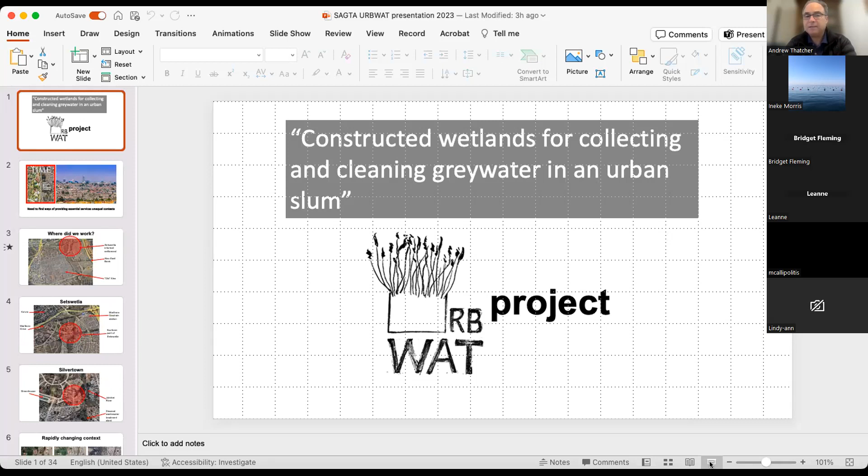Just to answer Bridget's question from earlier, that Vice Chancellor's Teaching Award was for innovation and social impact, which I'm most proud about is that social impact side of things, and it was exactly for this particular project.

I've actually given the very early part of this presentation before. Those who joined a little bit earlier would have heard me talk about the first time I gave this presentation to a SAGTA conference in Pretoria at St. Mary's DSG in 2019, in the land before COVID, when we were just starting the project. So for those who were there, this will be an update showing what actually ended up happening through the project, which also took place over COVID, which added a few complications.

Very quickly, the URBWAT project - it says constructed wetlands, but the actual project basis was to install a nature-based solution for the problem of grey water disposal, collection, and treatment so that it would have a lower impact on the environment.

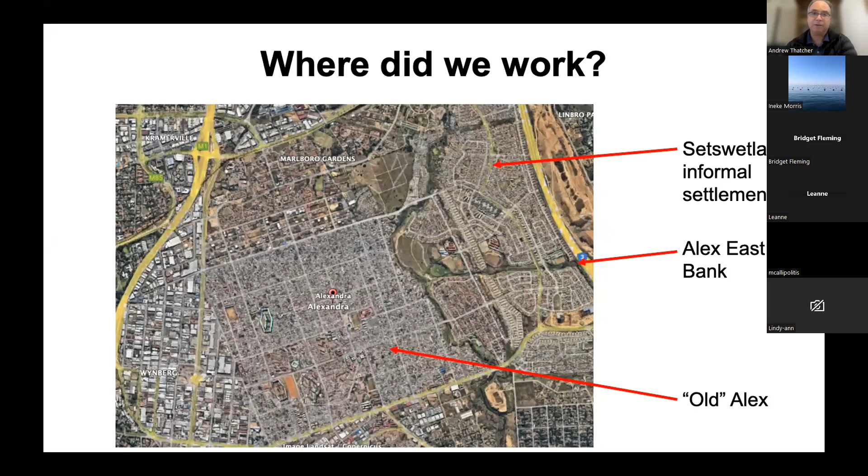We were looking at a small area inside Setswetla. This was a picture taken in 2019 when the project was first starting, stuck right on the banks of the Jukskei River, a little place called Silvertown, between what was called the greenhouse, set up by Gift of the Givers, and on the other side of the river, an old abandoned wastewater treatment plant, which was rather ironic given what we were trying to do.

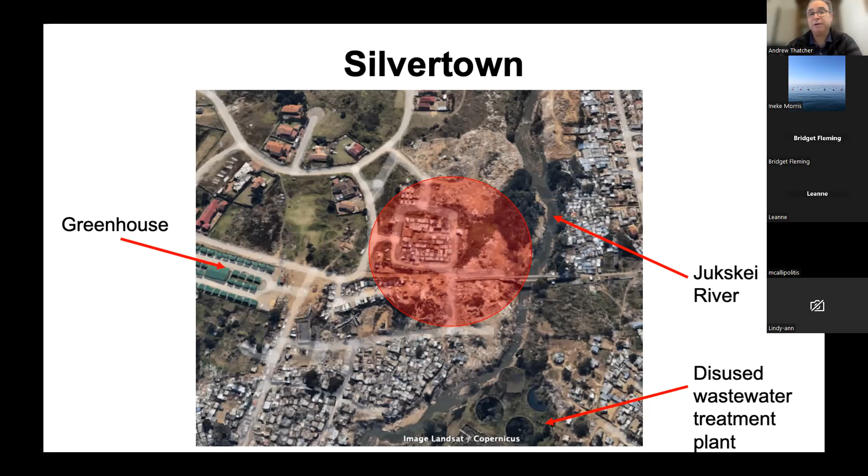This context has changed significantly over the course of the project. You saw a zoomed-in picture from 2019 of that area of Silvertown. Looking at it a year later, it looks almost unrecognizable - Silvertown is hidden among all the rest of these buildings, with a large amount of settlement happening within the space of a year to the north of Silvertown. Then by 2020-2023, a whole lot of other changes happened too - there's now a soccer field put in for recreation purposes, and the area has become even more dense around Silvertown.

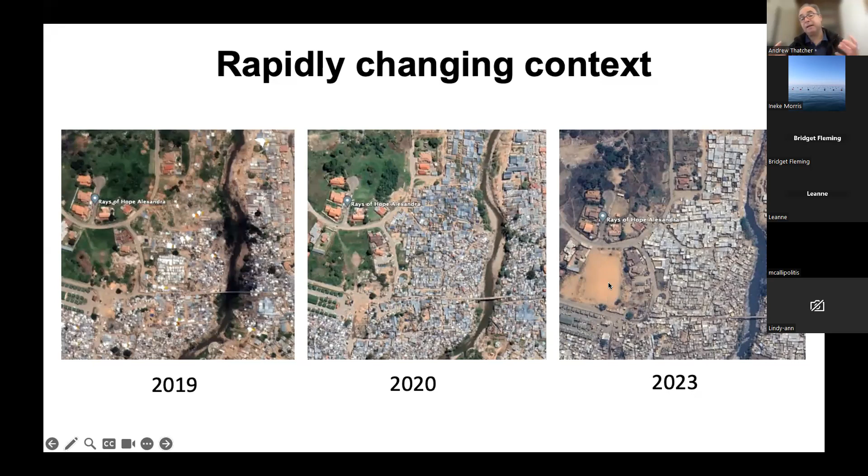What we did when we started this project - I've actually updated the figures from where they were in 2019 when I last gave this presentation. Back then we only went up to 500,000, and we knew that before the water came into the Setswetla area down the Jukskei River, it was very high, and when it came out on the other side, it was even higher, but we couldn't tell you how much higher. This graph is on a log, or exponential, scale, which means that when the water is coming in, the E. coli...

E. coli, measured in coliform units or colony-forming units, sits somewhere between 1 million and 10 million CFUs per 100 milliliters in the water coming into Setswetla. By the time it passes Setswetla, it's sitting somewhere between 1 billion and 10 billion coliform units.

There is so much bacteria in there that you could literally stand a spoon up in the water. It's probably more coliform than it is water itself. That's how much pollution accumulates in the form of fecal coliforms as it moves past this informal settlement, and this Jukskei River eventually ends up in the Hartbeespoort Dam.

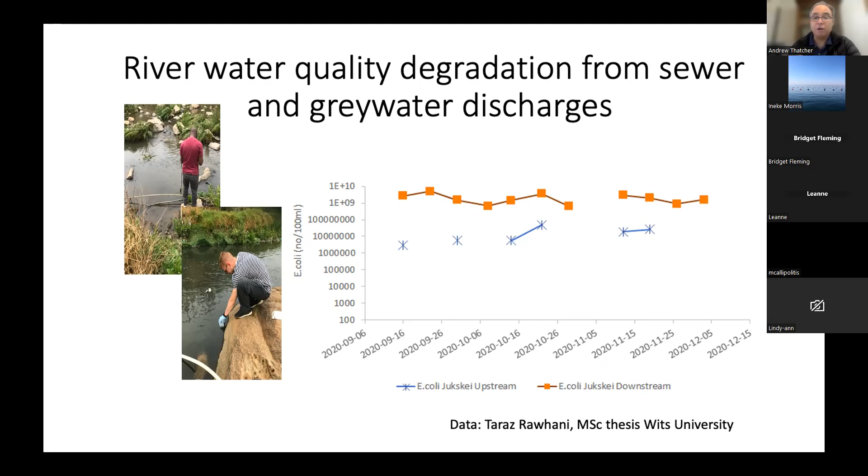So what is the problem here with grey water? The people in this particular settlement have access to piped water, municipally provided through communal standpipes they can collect water from, but there's nowhere for them to throw their wastewater away.

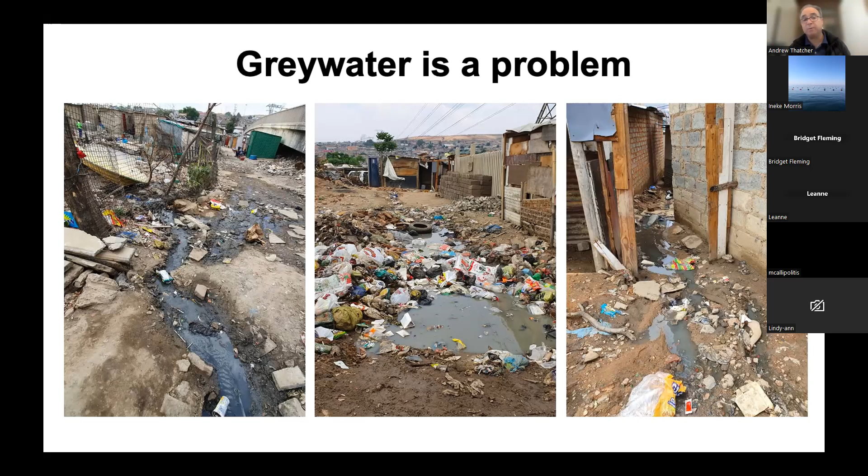Their wastewater, used for cooking, for cleaning themselves, or for cleaning their homes, ends up in the environment, either running through it, as some of these pictures show, or accumulating into pools together with other refuse. It's a particular problem because it ends up in the rivers.

That picture on the right-hand side, the dark color flowing through the rubbish, is actually what we call grey water, and you can see that it's a very, very dark grey.

I read a paper earlier this week showing that when the first rains start coming, around this time of year, we see a huge spike in hospitalizations of small children from diarrheal diseases. Unfortunately, roughly 15 children per month die in South Africa from diarrheal diseases, and we're not talking about cholera and dysentery, but largely issues coming from fecal E. coli.

We also have a particular problem in that space is limited, and these photographs show the types of spaces available for us to try to put in a solution. So we're really constrained in the types of solutions we might be able to implement.

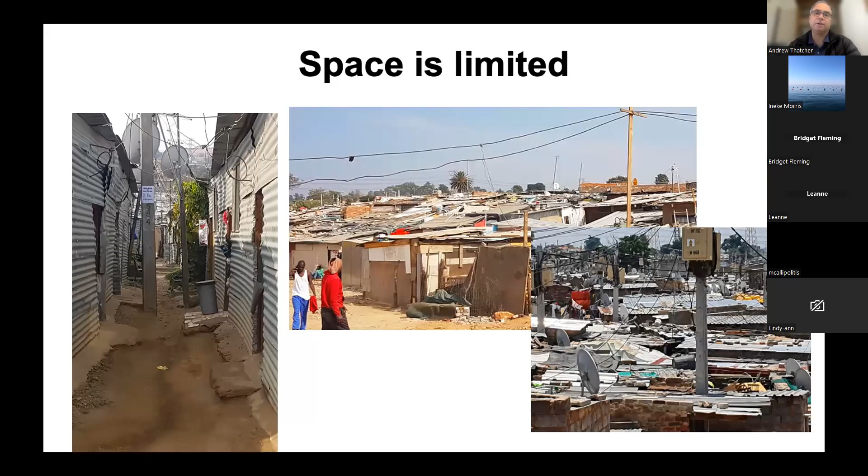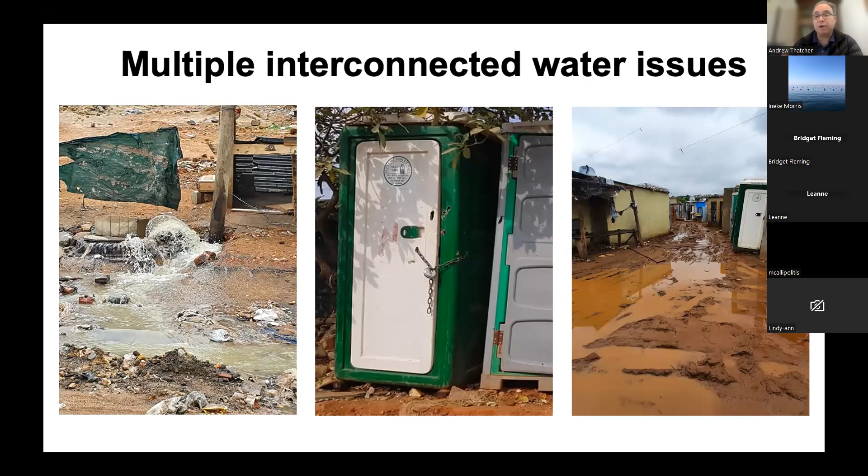We also have problems when the storms come along. Stormwater flows through the environment, picking up whatever rubbish is there and depositing it into people's houses.

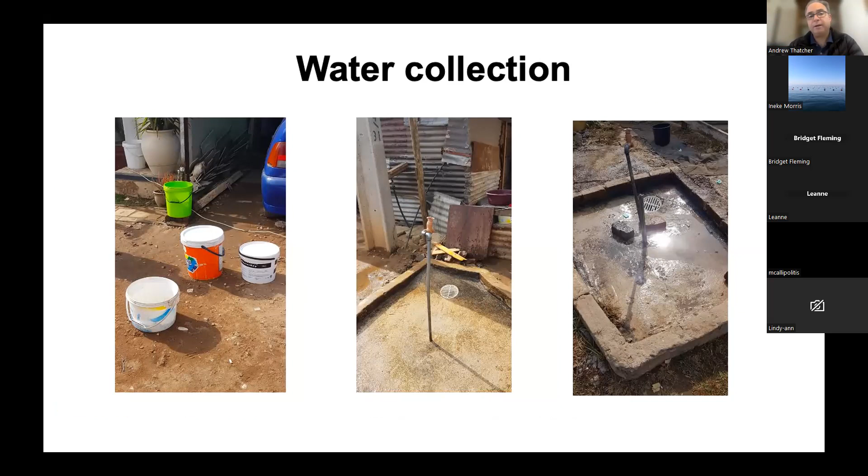Water collection usually happens from these standpipes using buckets, usually 20-litre buckets, converted containers and various other types. Water disposal is usually into the environment, either in dug gullies like the ones shown here, or just directly into the environment, flowing naturally down to the river.

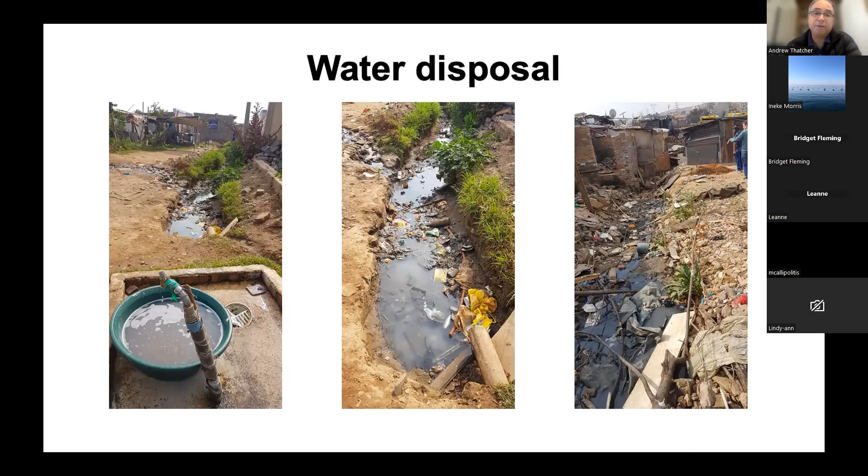So how did we start this project? Shortly after I met with you guys last time, we started our initial design workshops. We wanted to work with people in the community to come up with identified solutions, designed to be nature-based solutions.

We had 6 different workshops with roughly 20 people each time, from the community, where we looked at diagnosing the particular problem and then trying to come up with solutions. The solution we arrived at was an iterative design approach, since it became obvious we couldn't just look at one intervention and see whether that would work.

First of all, people didn't really know what a nature-based solution would look like. And even if they did know what a nature-based solution would look like, there were too many of these different competing demands to know which one would actually work. So what we did is we designed an intervention strategy that would look at build, evaluate, look at how we might change it, build again, build a second time.

What I've shown over here is actually what we ended up doing. We had a strategy in 2019 that essentially what we would do is we would rotate this through 6 months. So every 6 months we would put something in, evaluate it, and then redesign it and move forward. What ended up happening, as you might notice, between 2020 and roughly halfway through 2021 was the little problem of

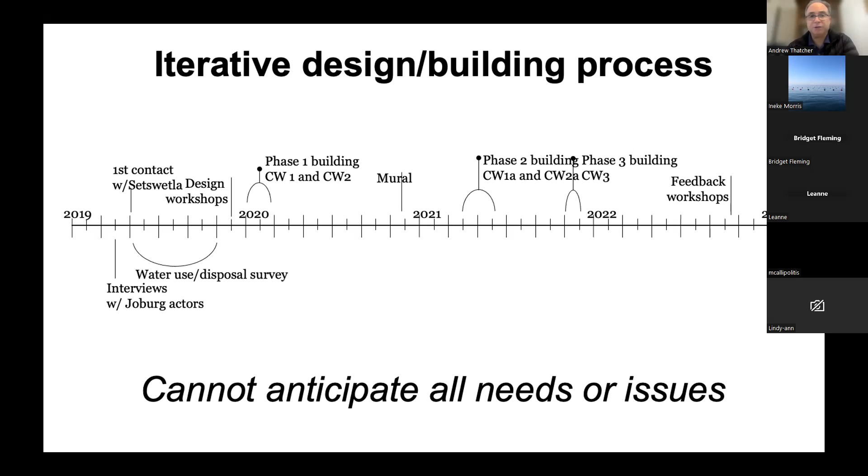So we identified 3 building sites from the people that we went into this area called Silvertown, and the residents of Silvertown helped us identify 3 different sites where we could build. In the first phase, we actually only built something at CW1 and CW2, so constructed wetland 1 and constructed wetland 2. And site 3 we used as a comparison site. So we're saying, well, this is a site where we could have, but what ended up happening in this site that was different from the other 2 sites?

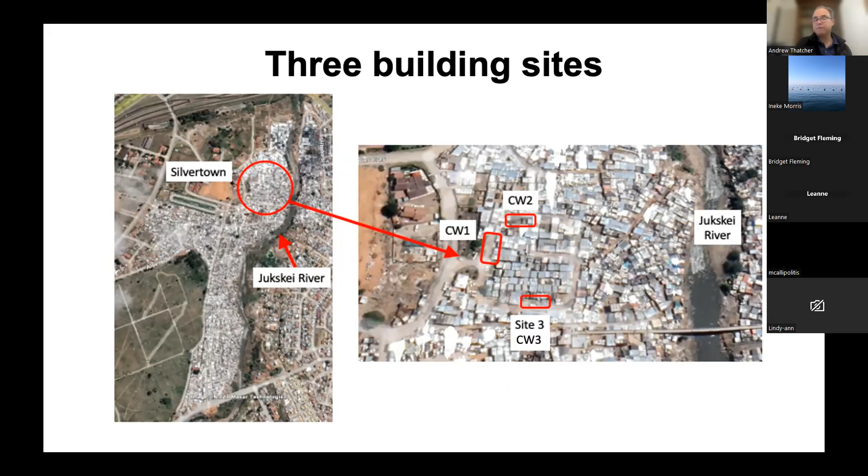On the basis of the drawings which people in that area had worked on with us, and working with people in the area, so these are all people who live in Silvertown, who helped us design and build these particular constructed wetlands, we came up with these 2 different designs. What we have over here is a raised platform for pouring the water in. We have the gravel beds where the grey water would pour through.

And what we did is we planted Juncus effusus. If you know anything about wetland plants, Juncus effusus is an indigenous South African sedge grass, which we'd actually seen growing in the Jukskei River. So we thought that this would be a good opportunity to say, well, if it could survive in that water, perhaps we can plant Juncus in this particular wetland and then see what ends up happening. This is what happened 6 months later.

So just to give you a bit of a timeline over here, we finished those wetlands on the Tuesday in March 2020. And on the Thursday of that same week, we went into a hard lockdown. So we really, for 6 months, gave it a hard test. We didn't do anything. And this is essentially what we were left with when we came there 6 months later, when we were first able to go back in with face masks and all the other types of sanitary and protective equipment that we needed to take with us. This is what we found.

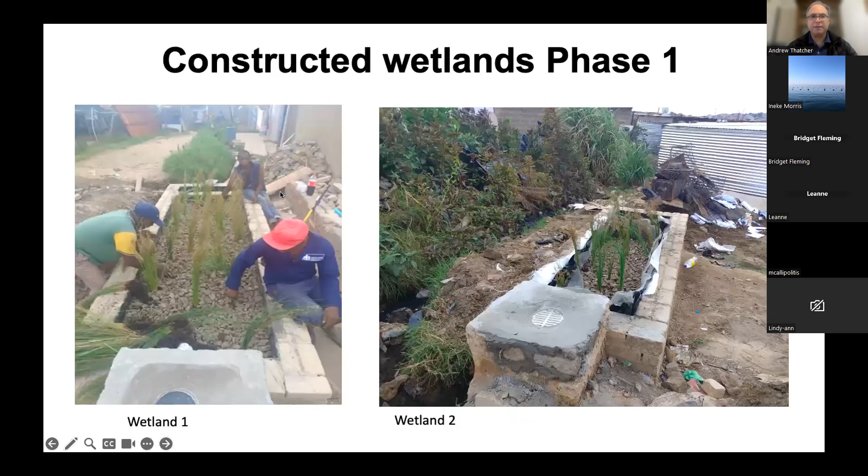There were a couple of Juncus over here that had managed to survive, but pretty much they were all dead. And in fact, if you go back a photograph, you'll notice this particular wetland over here, where this gentleman over here is sitting. And you'll notice that someone had built their home right up against the wetland. So it wasn't just that our wetland had changed, the entire environment around it had also changed. So we looked at what might have ended up happening, and we tried a couple of interventions.

So the first thing we did is, against this particular corrugated iron, we found someone in the community and they painted for us a diagram of what the wetland actually was and showed people how to use it. And then what we also did is we thought, well, maybe these Juncus that we'd got, which were actually bought from a nursery in Melville, where I stay, maybe they weren't the right plants, maybe they weren't habituated. And so we went down to the Jukskei River with a lot of protective equipment and dug out the Juncus on the banks of the Jukskei River, and we replanted the constructed wetlands with that.

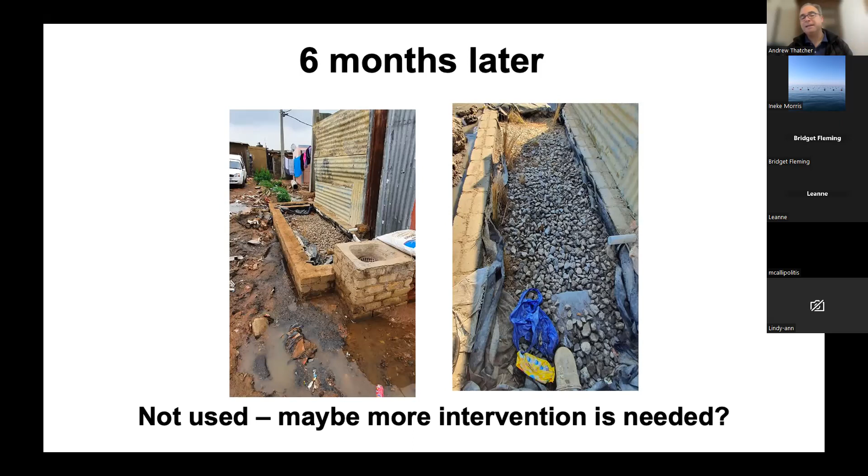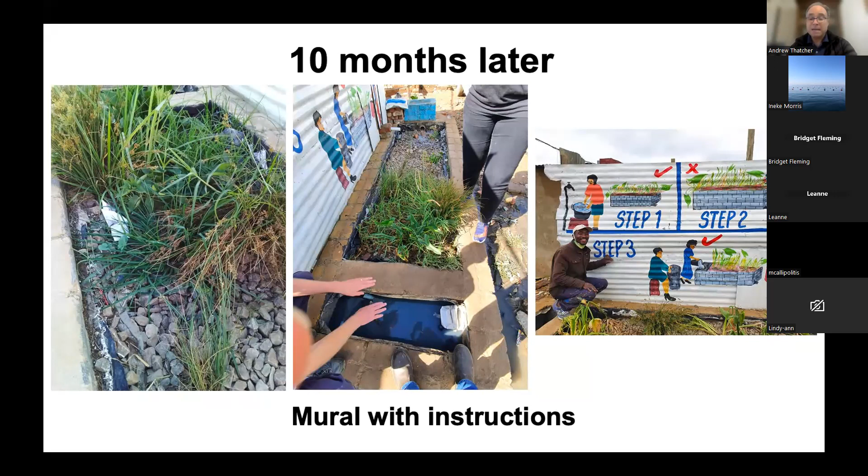And then we also have a picture of Goodwill, who very kindly allowed me to take his picture of the drawings showing people how to use the wetland itself and also what to not use it for. What we did after that is we ran a usability study. We had some of my students come in and they did observations over 3 days, and we looked at how people were actually using these wetlands. And you'll see that two things happened. First of all, we found that there weren't actually a lot of people using these wetlands.

And when they did use the wetlands, you can see in this picture in the middle, they were throwing their water to the side and not actually into the wetland. And the entry point was being used as a table rather than as an entry point for the wetland. There was some water going into the wetland when people had much smaller buckets, but these larger buckets, which are in this particular case used for washing clothes, were not actually being used. And so we went back to the drawing board again, and we went back to the people living in Silvertown, and we looked at what we could be doing to try to get it to work.

What we did notice, though, when we're looking at the hard science type of things, is that the wetlands were working. So when we looked at measuring, and this is the chemists on the project, they were measuring the E. coli as it went in, at the entry points, and E. coli at the exit points. And again, this is on an exponential scale. You'll see that the outs generally are much lower than the ins. So the outlets are much lower, except for one point over here in September 2020. The rest of the times, the E. coli measured as it came out was much lower.

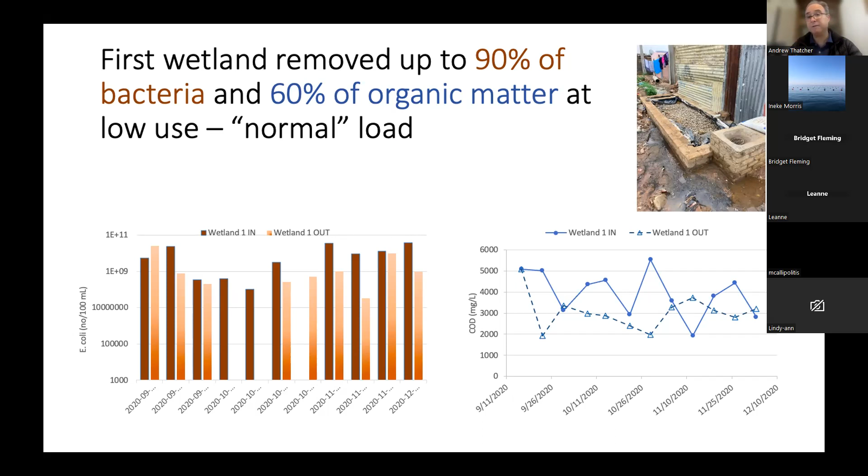In fact, what we found is that it was reducing roughly 90% of the bacteria, and 60% of the organic matter was being removed through the wetlands themselves. And something called COD, which is essentially a measure of the chemical oxygen demand in the water, shows us that a lot of the oxygen was being used up, so there was a high oxygen demand in these particular wetlands, which shows that there was a lot of bacterial and life activity happening in the wetlands themselves.

Here are some of the engineering sketches that we had of now looking at Wetland 3. We designed Wetland 3, sorry, we didn't actually implement Wetland 3 at phase 2. We implemented it at phase 3. But what you'll see is that based on our observations and chatting to the people in the environment, we built a washing area. And this washing area then directly connected onto the old wetland, the wetland from phase 1, and then a much longer section that we had. And we designed this for a number of particular reasons.

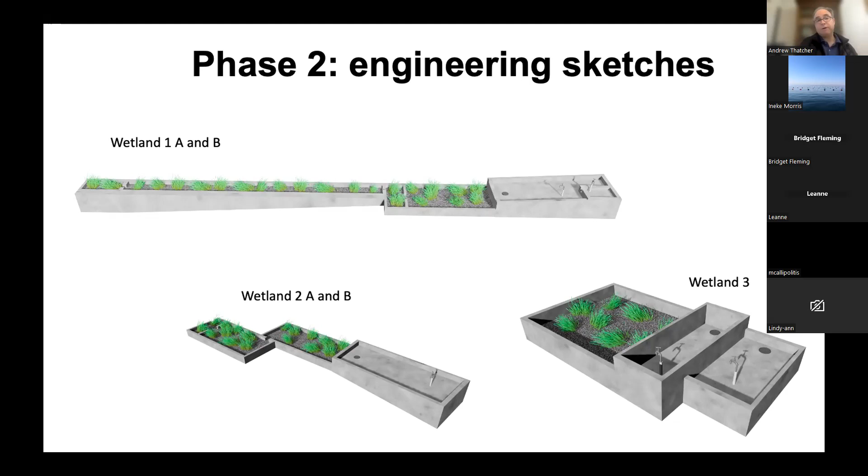First of all, we noticed that people were bending over a lot when they were doing their washing. And we didn't want them to have to lift up a large, heavy bucket. So instead, we created a washing area so they could lift their empty buckets onto there, fill it up with water and do their washing in that area. And then when they'd finished and needed to empty it, all they needed to do was turn over the buckets, and the water would flow down the sloped washing area into that inlet into the wetland, and then flow through the wetlands, and we'd see what ended up happening. So here is the particular design. This is actually what it looks like in real life, the ones on the left and in the middle.

And this is wetland 1. On the left-hand side, you can see the diagram showing it flowing through two different taps, one tap. So for example, if someone was washing, someone else could still come along and collect water for their house, or for drinking or for cooking. And then it would flow into that wetland.

That picture in the middle shows how we elevated the wall, and notice how we made the wall much wider. So as I said, for 3 months, the sewage flowed through this area. And it actually didn't flow into people's houses because we designed this gutter along the side. Ostensibly, we designed it to protect them from stormwater, but it actually also worked to protect the residents from the sewage which spilled in that particular area.

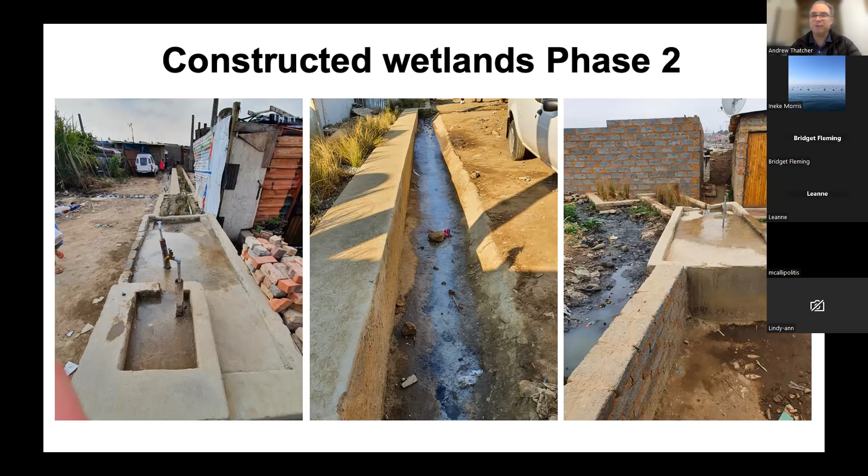And on the right-hand side, you can see that we also had to build walls to keep the water away, and that's wetland 2 on the right-hand side there, a similar type of design, and someone was also building their house almost right onto that wetland. We then allowed this to settle for 6 months again, and then we went in and had a look, and we did another observational study looking at what ended up happening in this environment.

So you can see the ladies on the left-hand side, they were using it exactly as we had intended, and this gentleman on the right-hand side, not quite exactly as we'd intended, because he's actually standing on the side where the grey water flows past. But you can see how it protected the houses from that grey water, preventing it from going into people's houses. And the walls themselves were actually used as meeting points.

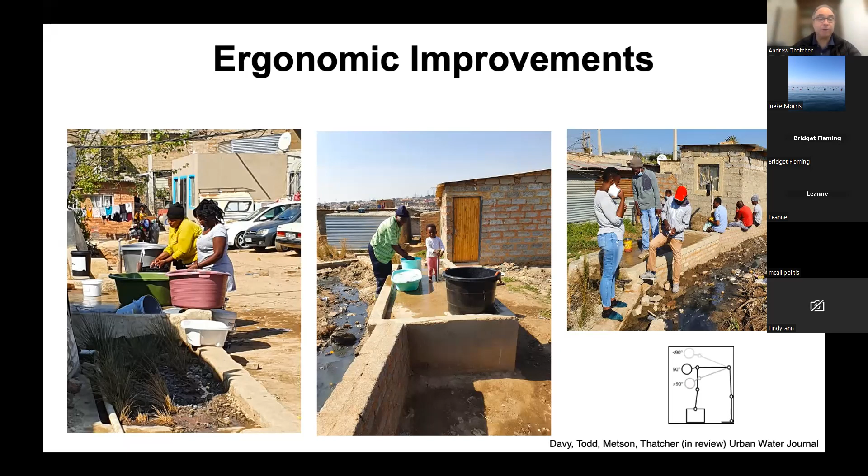In fact, that one on the right-hand side was a very popular meeting point. It was sheltered from the wind, and it was a great place to go and have some casual conversations and maybe smoke a little bit of weed. So essentially what we ended up managing to design was areas which were more multifunctional.

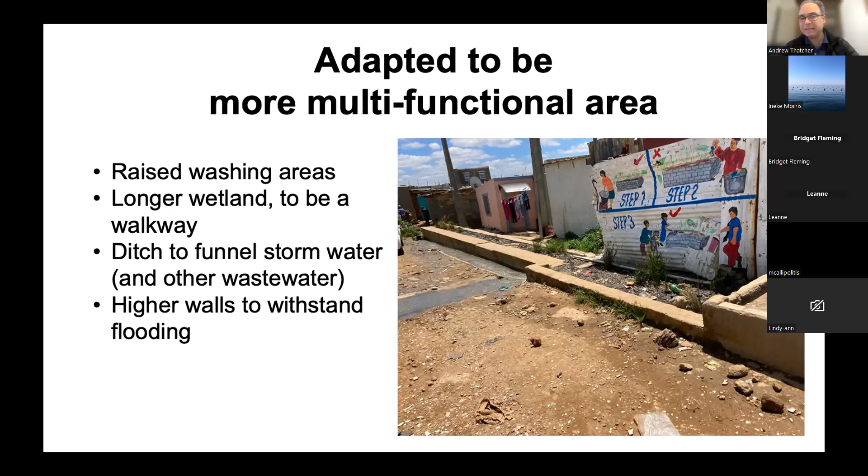In this particular photograph, you can actually see the sewerage flowing. It comes in from the left-hand side of this picture and flows down next to our wetland. So we're keeping it separate from the wetland, but also separate from people's houses. And it also acted as a walkway, so people didn't actually have to walk through that sewage, but could step up onto the constructed wetland itself. The plants have survived relatively well, not fantastically well, but they are surviving.

When we look at taking chemical measurements about what's going on, the first thing we notice is that the water coming in is highly alkaline. The pictures on the left-hand side show us why, as well as the probe that was in there to measure the pH levels. And that's because we have a lot of washing liquids, which tend to be quite alkaline.

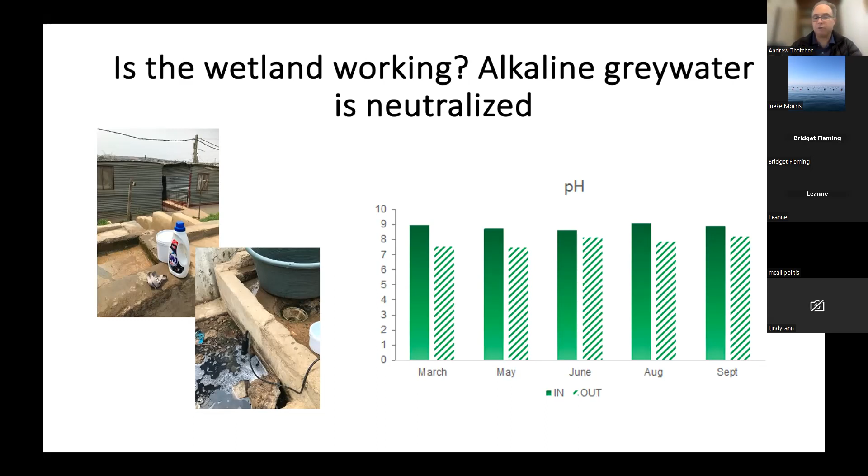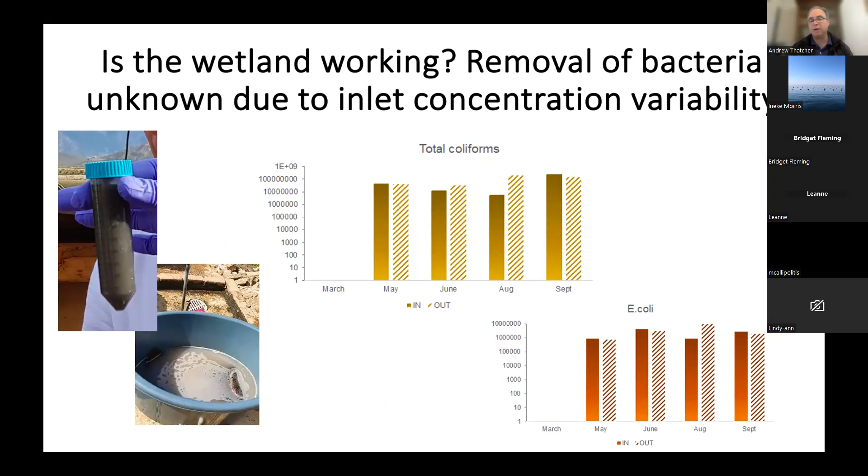So what we find is our wetland is working incredibly hard. There is just too much E. coli going in here. The measurements of E. coli going in here, if we go back over here at the endpoints, are sitting at roughly 10 million E. coli units, between 10 million and 100 million E. coli units going into the wetland.

So there's a lot of E. coli in here, and the wetland itself is working very hard to try to remove the E. coli. There is just too much E. coli in there for it to remove it. And so every now and then when we get these flush effects, for example, when someone pours a bucket of fresh water into there, it flushes through the system, and it actually flushes the E.

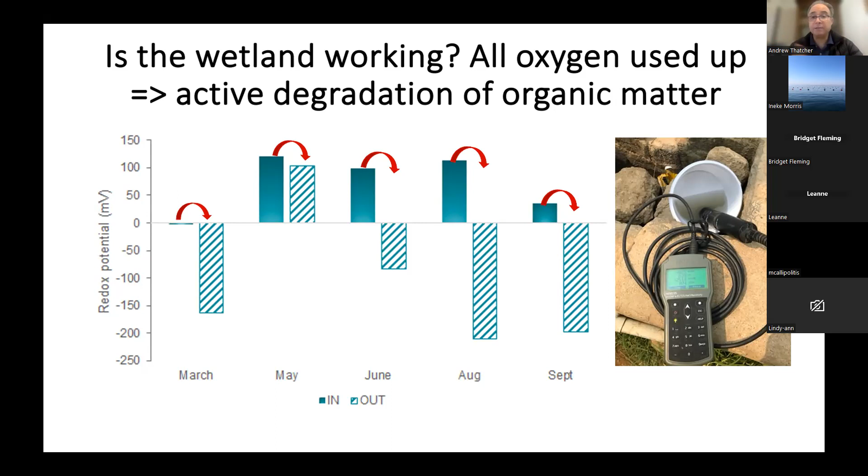coli out rather than having a longer residence time. So what we need in this type of environment is a much longer residence time.

So in summarizing, and I'm getting to the end of my talk now because your two facilitators said that I must try to keep this at roughly half an hour so I can leave some time for questions.

What we managed to do is significantly increase the amount of grey water intake through this redesign process. We also managed to have a number of other types of benefits which weren't the primary purpose of what we were doing, but also are incredibly important for the community. And those include things like having a raised walkway for the community residents, so they didn't actually have to walk in this sewage as you see it passing over here. It also acted as a sewage spillage protection.

We created communal areas where washing activities, particularly if we compare this to the rural environment, we have mostly women who are doing the washing, so creating these communal areas. We've reduced the chances of back injury by raising the platform for the washing so that they don't have this excessive stooping posture. We've heightened awareness around grey water and grey water risks, which means that people living in this environment are more aware of what's going on.

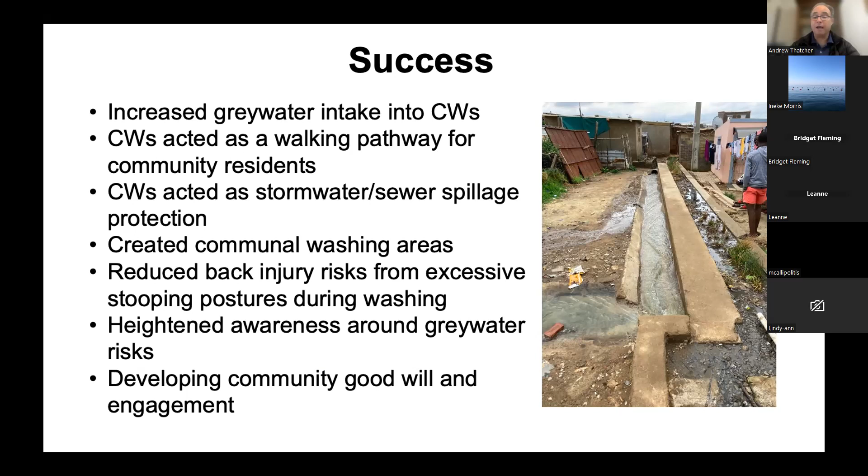And probably equally importantly, we've created a huge amount of goodwill in this area and engagement. We continue to be involved with not just this project, but with a number of other people who've found us out and are also trying to do different projects. There are at least 7 different departments at the university who are now working in this area, and that's part of the goodwill which we've developed going into that project.

But there are things which have been less of a success, and these are also important to notice. The increased grey water disposal into the constructed wetlands has led to reduced residence time and therefore a lower treatment effect. In other words, we're a victim of our own success. By making it more successful, by putting more water into it, we get less of a treatment effect.

We also notice that there's a rapid amount of sludge accumulation in the constructed wetlands. Within 3 or 4 months, they become completely clogged with sludge. We've gone and we've measured the sludge. Most of the sludge actually comes from fabrics. So in other words, from the washing process, that hand washing process rubs off a lot of fabrics into there, and that gets caught up in the gravel, and it starts to block the treatment function. So we need to look at a different way of creating maintenance, or alternatively settling to try to remove the sludge before it enters into the wetland.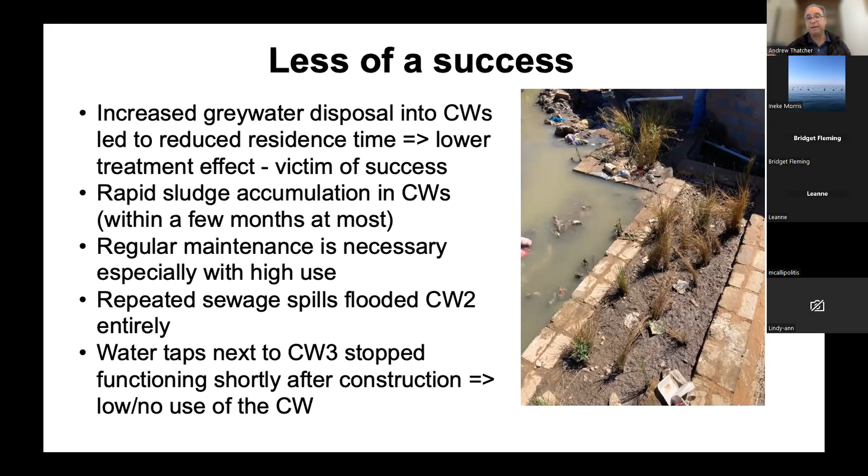I neglected to tell you about constructed wetland 3. We built a large portion of constructed wetland 3. I'll show you a picture of it in a slide or two. But what ended up happening is we built constructed wetland 3, and then the tap stopped working. So it never actually operated as a constructed wetland. And that's just a factor of the environment which we're in. We got fairly lucky with constructed wetland 1 and 2 that the taps still carried on working. But in constructed wetland 3, too many connections were made to that standpipe, and the pressure just dropped off completely. And when we raised the taps, there wasn't enough pressure in there for the taps to work.

At constructed wetland 3, the residents asked us to take out, and in constructed wetland 1, we actually removed all the gravel and cleaned it. I haven't been there in 6 months, although my colleagues have been through there. But we have just got some new funding, partly on the back of winning this award. And so we'll be going back in to see if we can try to solve some of these problems.

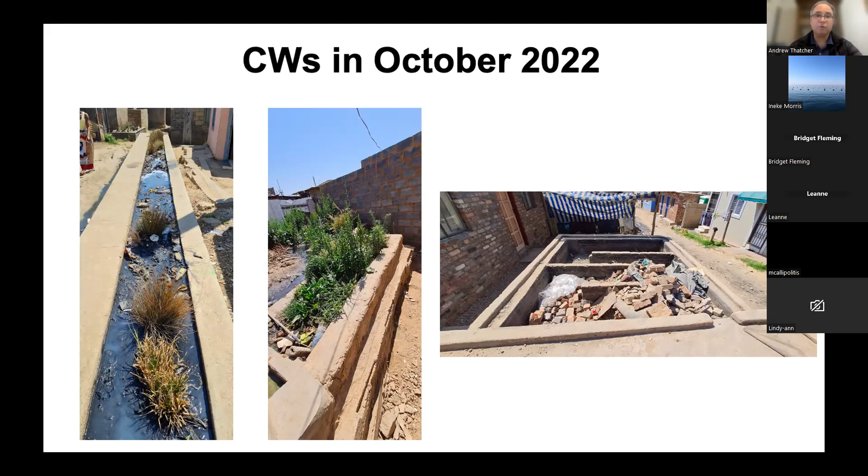But despite all of these things, we can and we did make a difference in the context where we chose to put in an effort. The project is making that water safer. The wetlands are working as hard as they possibly can.

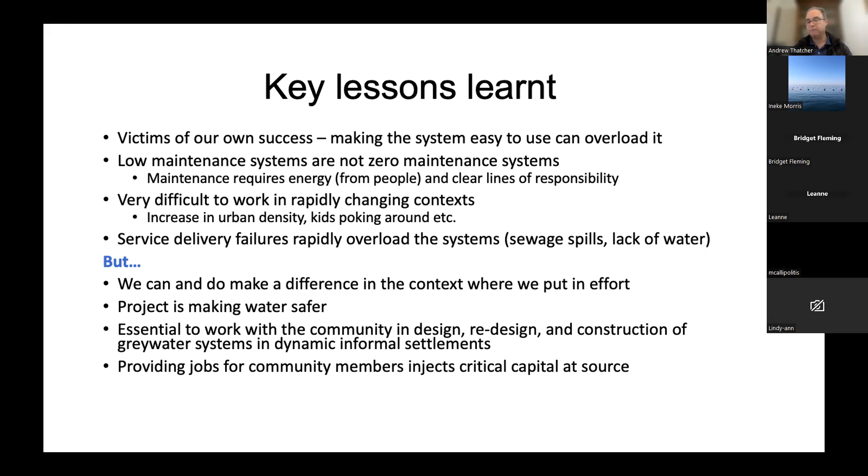We learned that it's incredibly important to work with the community in designing, redesigning, constructing, involving the community in helping them take ownership as much as possible. And that this is also a way of injecting capital and providing jobs for community members where they have none. There's so many people just wanting to come and help us for what seems to me totally minimal amounts of work.

And of course, in my last slide, to acknowledge all the many people, both researchers and students who were involved in this project, both here in South Africa and at our 2 other research sites in Sweden, at Linköping University, and at the Helmholtz-Zentrum für Umweltforschung in Leipzig in Germany. So we had students at all of these centers working; I've shown you the practical implementation side, but we also had students working in labs to see how these systems were actually working.

And the money came from something which is called the Water JPI, which is EU-funded work. How EU funding works is that essentially the JPI stands for Joint Programming Initiative. So what happens is each individual country contributes to a pot, and then that money is assigned to the project. So we had money from Germany, Sweden, and from the Water Research Commission in South Africa.

So without further ado, I'll stop at that point and ask if you have any questions. I haven't been monitoring the chat. I'm just going to stop sharing for a second so you can actually see me, and I see that there's no questions. So either you've all fallen asleep, or alternatively you've been blown away and are just waiting for me to stop talking so that you can be ready to ask your questions.